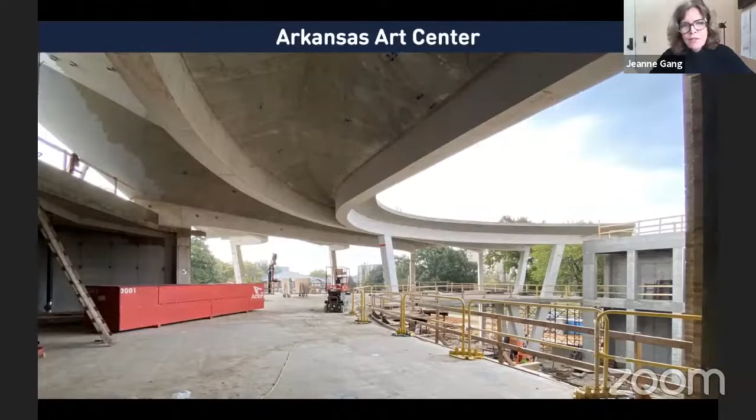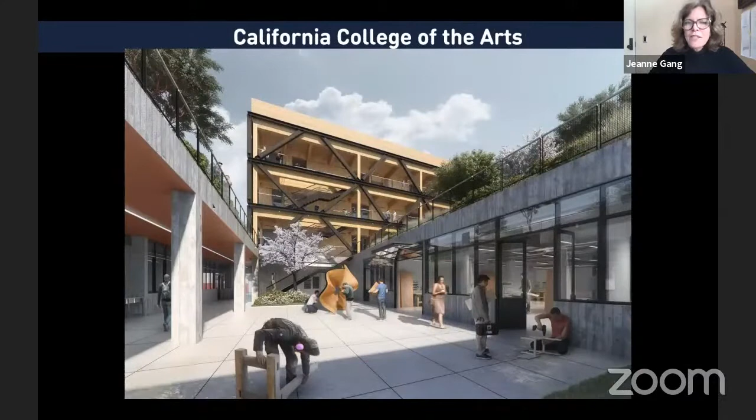We're in construction on the Arkansas Art Center, which is really a campus of buildings that we're editing and adding galleries and social spaces to. We also have a project just beginning construction in Paris: the University of Chicago Paris Center, which will be their place for overseas studies for students, and the California College of the Arts, a really interesting timber structure in San Francisco.

And of course, we have the Q residences in Amsterdam, currently in construction as well—two residential buildings paired in the south part of Amsterdam. The thing about the sharing I was talking about before: this recently published book by Phaidon groups these projects into families and shows how they're related to each other, and how they make people relate to each other and to the environment.

My first practice, going back a little bit, this will be in kind of 3 parts: the beginning of this idea about community, sharing and relationships in first smaller scale projects, then taking that to a larger scale, and then bringing it back to more connected urban realms.

This picture shows my office before, when we were on the 2nd floor of this Aldo shoe store in Chicago, right across from a wig shop, in this very gritty part of the city.

At that time, I was starting with projects that were community centers all over the city. For some reason, it was just a program that found me, but it allowed us at Studio Gang to really learn these different communities. Chicago really is a city full of different kinds of communities, different characters, different nationalities of immigrants gathering in parts of the city.

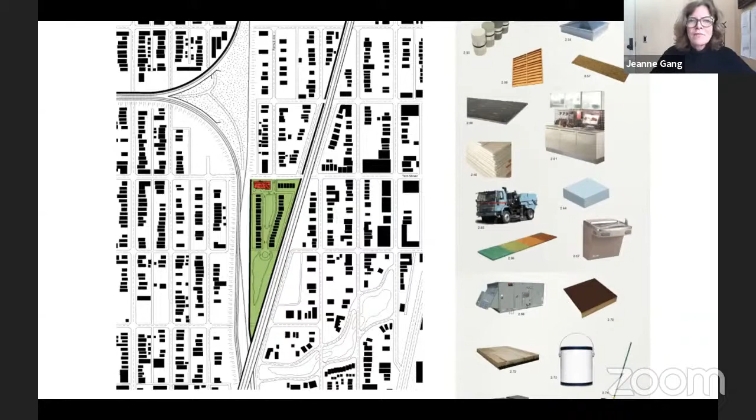It was really interesting because everything about this project was donated: donated materials, donated services, donated site, this green triangle. The red is the community center, and the little homes along the railroad track were the foster homes. It was eye-opening because I saw there was almost no money for this very important program.

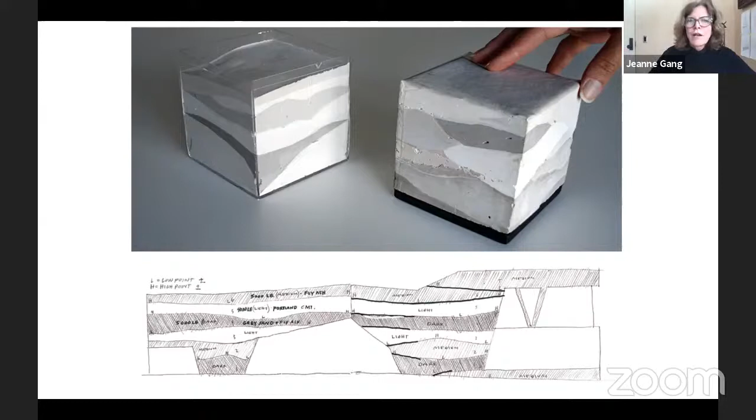So in this project, we actually asked some of the big commercial projects downtown in Chicago to give us their extra concrete. We developed a way to expose, show and celebrate this donated liquid concrete from different buildings coming together to create the shell, the frame of the building, which was so exciting for me.

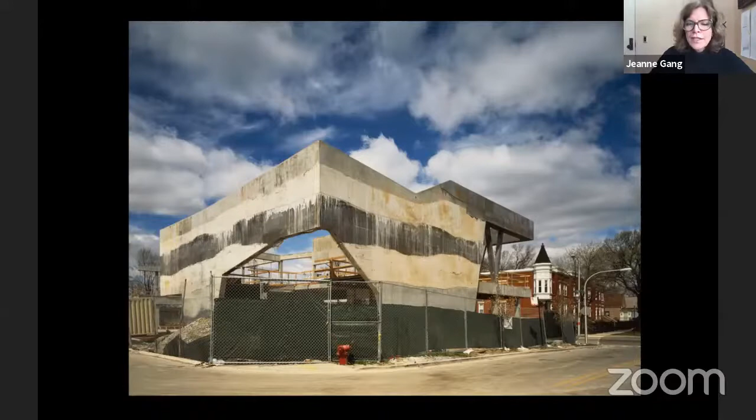When we ripped off the formwork, you could see the real pattern of the fluidity of the concrete, and each mix was performing its best duty, the strongest ones next to the weaker ones, working together to create a support shell for the building.

This community center in the Calumet area, a kind of area full of former industrial sites, the idea was that we wanted to reduce the footprint of this building by using and reusing materials that were thrown out or left over.

This building was a kind of metaphor for a nest, built by birds who are trying to use things that are abundant, nearby and available.

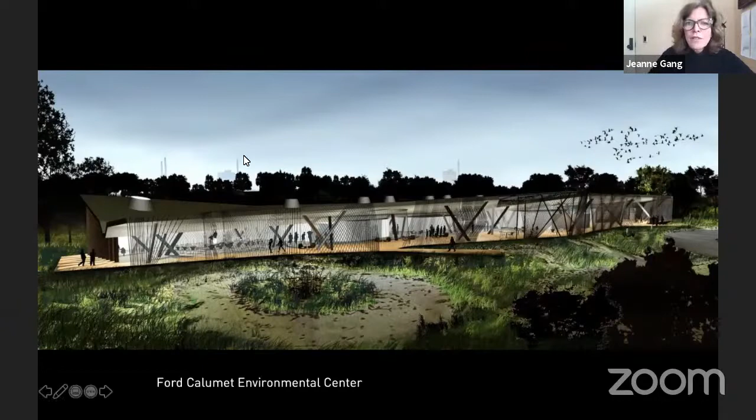If you take that on as a strategy for architecture, it's quite interesting, and it produced an incredible thesis. These column clusters would start with what's there, what materials you could find, and then be designed structurally to work with whatever type of steel one could get at that time.

A lot of steel is rejected from projects for various reasons, and normally it would have to be remelted and reformed. But here we could use members that were maybe slightly bent or flash rusted, and create these column structures. So we had to design these to be workable for whatever we found. This is really a different way of thinking about architecture.

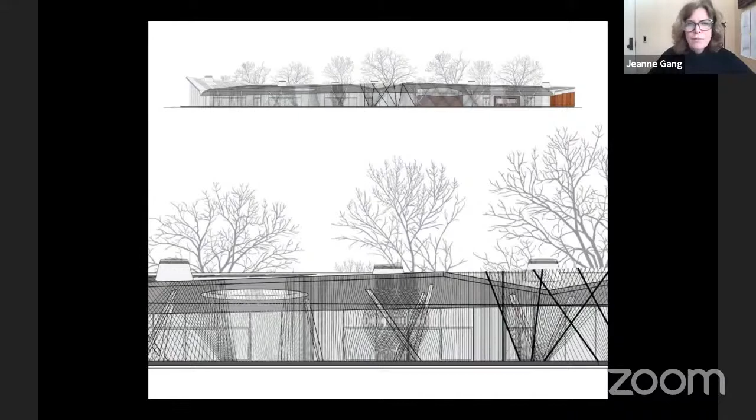That produced this kind of building that also had a protective mesh to protect migratory birds that move through the area. So with these early projects, it's really about observation, which is also called research.

I really think this idea of observing means we can learn from looking at patterns of social behavior. And I realized in these early projects that instead of channeling the previous generation's preoccupation with purely formal moves, we could use these skills and observation to affect change, to instigate change through architecture, essentially one project at a time.

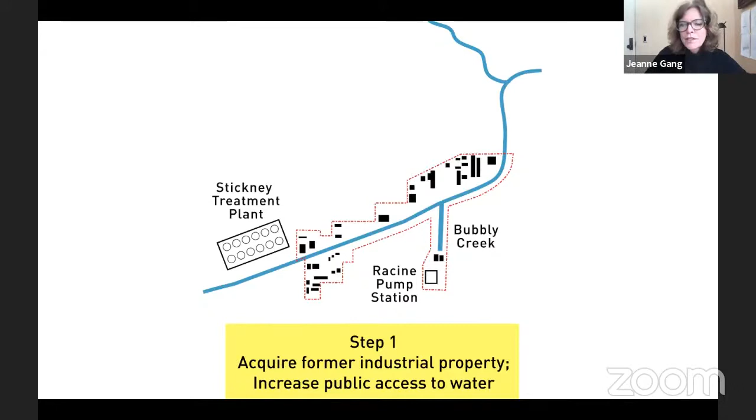Eventually that book project was seen by the mayor of the city and others, and we did some talks about it. Soon enough, a new mayor came in and wanted to put a mark on the city by reintroducing the public to the river. At that time, a number of architects, including ourselves, were asked to do projects along the riverfront.

This one is a boathouse that would suddenly bring youth to the river. Even though the river is still polluted, the whole idea was to create a whole new generation of stewards that would then care about the quality of the river.

In a way, you're creating the future you want to see through your practice, and that's what I've been trying to tap into. For the project, of course, the architectural form is important, and the design is important. We were trying to make this moment of engagement with the river very exciting and dynamic.

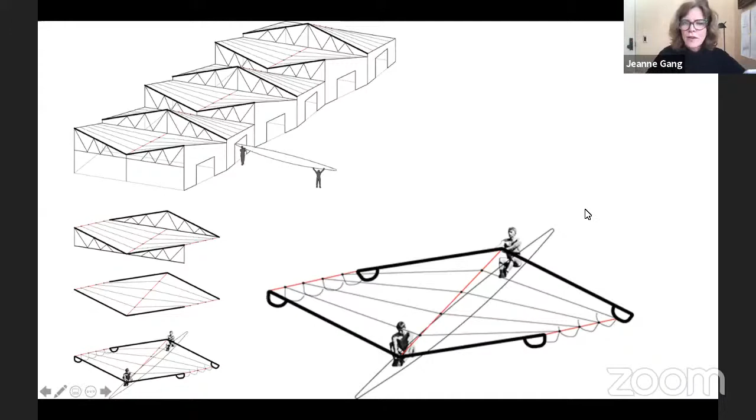Here's a little model of that building, and you can see this warped surface. All of this had to be done on a very tight budget but also a fast schedule, as you have with projects supporting a political ambition, I guess you could say. But here the ambition was a good one - to get people to the river and create programs for youth in the city to help them succeed.

This is done with slate on the exterior. The park district, who is the client, wanted masonry buildings, and we convinced them that slate could be considered masonry.

Inside, on the second floor of the field house, you have this Vierendeel truss system, kind of eking out an extra floor by using a Vierendeel and letting it support yet another floor and a roof, using simple plywood—not high-end plywood, very affordable materials—to create a very dynamic space, almost like the hull of a boat, and that really gives it this dynamic feel.

This program has begun to expand—there are classes there for veterans with disabilities, and all kinds of people are using this.

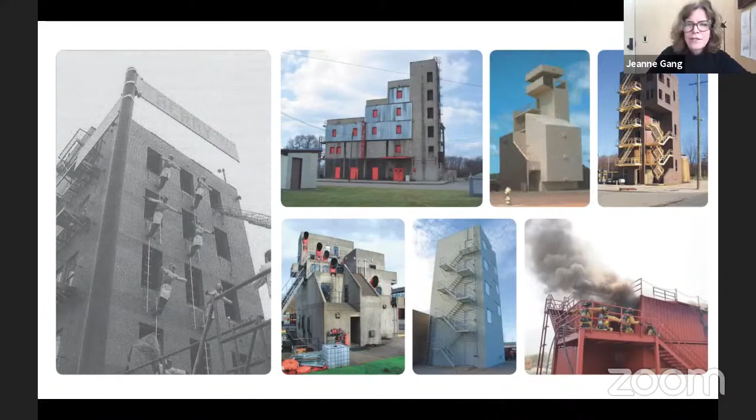So in this project, we were looking at what practice is for rescue workers. These are like test buildings used for that purpose—lots of stairs, lots of openings—because essentially what they have to do is go into a burning situation with smoke, poke holes in the building, allow the smoke to get out, get in there, and get people out.

I was amazed to learn that rescue workers really know architecture. They know every single floor plan of the different styles of buildings in Chicago. This is one of our sessions working with them to figure out how to design their practice facility.

And this is the final building we finished. It took a number of years to complete, but it's really all about these voids—the voids that are used for practice. You can see them up on top.

Different ways to move in and out of this building, using it as a tool for learning how to fight fires and rescue people. It's also had this kind of positive impact on the neighborhood as well. When we first started there was nothing, and now it's really having this expansive effect.

These are some views inside, of the fire truck going in, and this void that goes up and down the middle, bringing in natural light to the gym and the other areas used for practice.

This is the area where you can see the scale on the wall, learning to judge dimensions, et cetera. We used a simple concrete tilt-up structure with some fancier terracotta baguettes around the openings to highlight those. That was just finished last year.

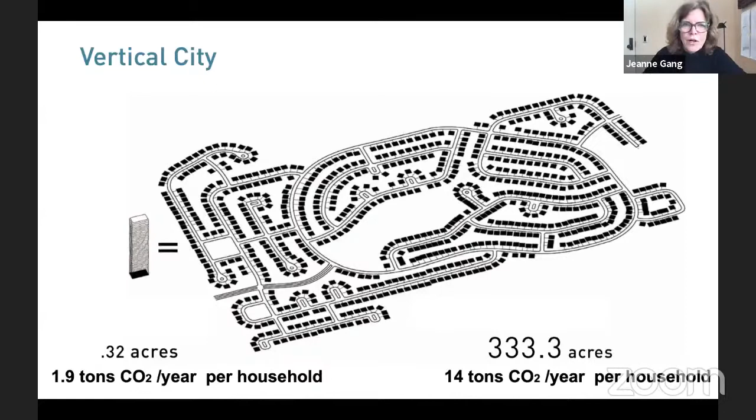Discovering that people really didn't talk much to each other in these towers, observing the behavior, like people in elevators. It's kind of awkward being in an elevator and having that separation between living way up in a building and going to the outside.

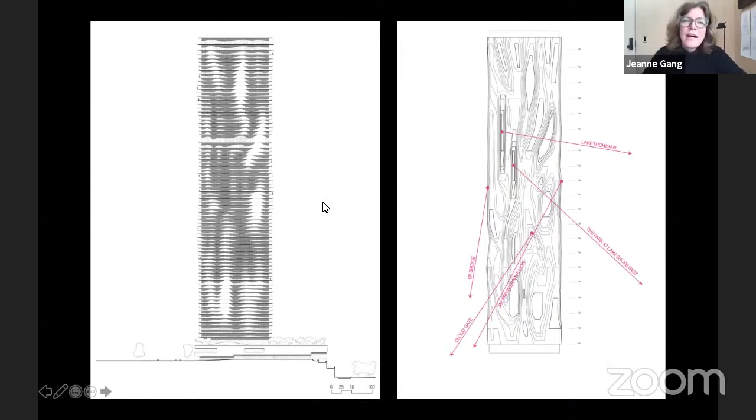So we took some cues from the landscape around Lake Michigan, like these irregular edges that seem to give you diagonal views and patterns that break up the monotony. This building was really done thinking of it as a topography, where the hills would connect people to different things in the city around them, if they could step out onto those hills and see around corners and things that wouldn't be possible if you were just in a straight up facade, and see each other, of course. That's really how it started to develop.

So the irregularity is purposeful in that it allows this connectivity, but it also breaks up these strong winds that are troublesome for tall buildings, which really make you have to use a lot more material in the structure.

Some of these balconies are very large - they can host parties and things like that, socially connecting people to each other and at the same time to the city beyond. The balconies became, for these types of residential buildings in the city, this intriguing way of making a threshold, an exterior space that's both inside and outside - almost like a front stoop would be if you lived in New York, or a porch.

This project called City Hyde Park explored using the balconies in this way to connect people. Each one of these is a stem, modeled here on the right, and they're just rotated in different ways to give different conditions. Sometimes they're two stories high, sometimes more like an extended cantilever. They give an animation to the facade, a kind of rhythm, and create almost like a social network on the exterior of the building.

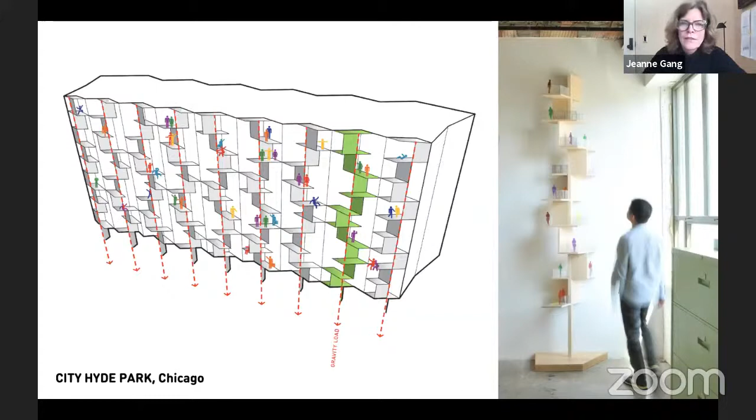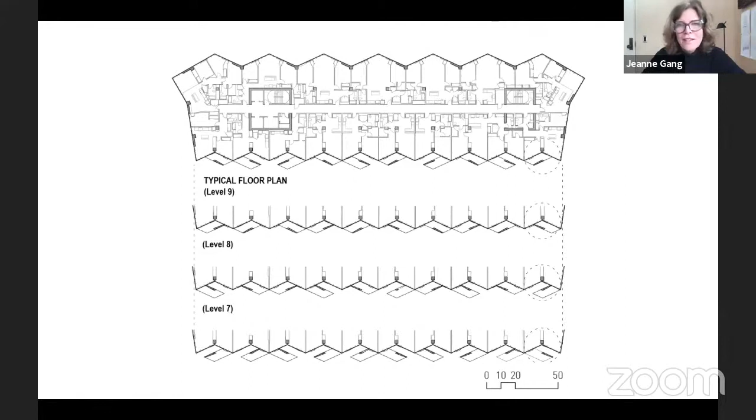If you look at the plan, which is very simple, the north side had these bay windows overlooking the city. I was thinking more introverted people could live here, and extroverted people could live on the south side with this really active, dynamic facade. Supposedly it has kind of worked out that way.

This was designed for a mix of incomes, and it does include low income housing within it as well. So it's really a mixing chamber as well.

Here you can see this pattern, which really starts to be Escher-esque when you look at this side of the building.

Another aspect of how to design these commercial buildings with something in mind for the greater good is this one called Solstice, where the client wanted to have balconies for about 30% of the units.

So we thought of carving the facade back to create solar protection. In Chicago, this is the solstice angle of the sun at 72 degrees, which means that in the summer, when there is a lot of heat gain, this angle really protects the entire interior spaces from direct sun. In the winter, when you want that heat gain, it can come right in. That was kind of the proposition and question for this project.

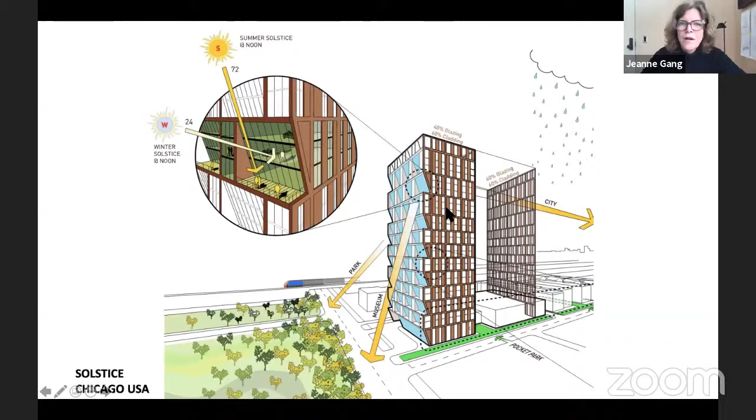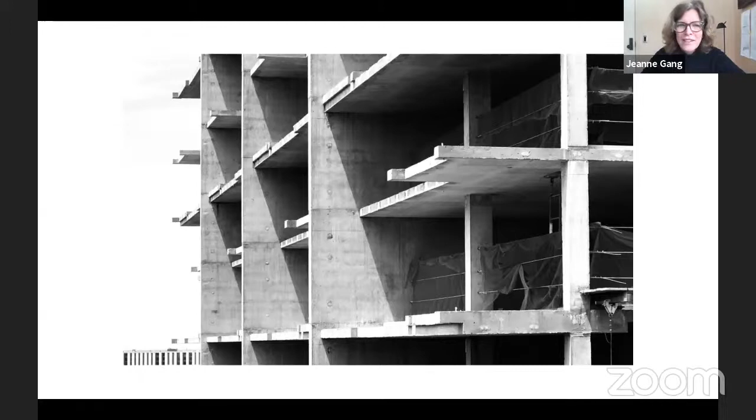Just to show you how some of these things come out - of course, this also makes really nice social spaces for people. This was a picture during construction at Solstice, where you can see that angle rendered in light and shadow, showing the whole idea of the building. But then you get this almost expansive space on the inside that gives you this feeling of greater space than what the floor plan actually is.

And then, lots of common areas in this building too, experimenting with living in the city and making that more interesting. And then there's this last one that I wanted to share about a commercial building, an office building.

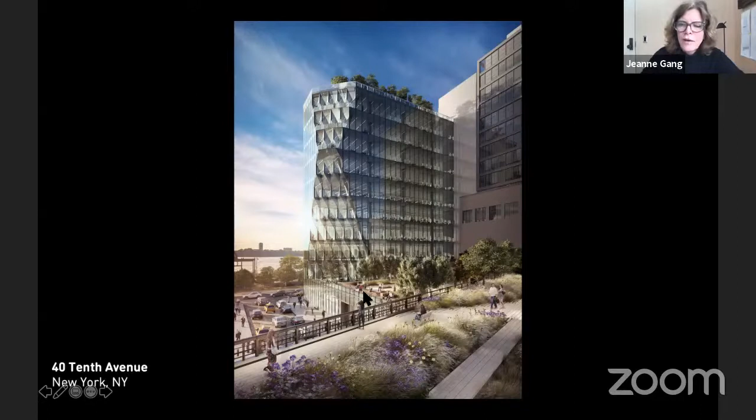So just the framework for thinking of this project: our site starts right on the High Line and goes back. We really took a look at the high-rise code for New York, the tall building ordinance, which required—these are illustrations by Hugh Ferriss—that all the buildings in New York be carved back from the street in order to let light and air down to the street.

Hugh Ferriss did these images showing the code translated into a building, so you get the step-back skyscraper. What I want to show you is a kind of turning that on its head, because when we apply this red L-shape setback ordinance to our site, you get that step-back skyscraper. But actually, with the amount of area we have, we get an L-shaped building with a podium.

When we looked at this, we realized how the High Line had really become the public space on this site more so than the street, because the street is wide open to the river. We argued that when building along the High Line, which is an interior block public space, we need to think about this differently.

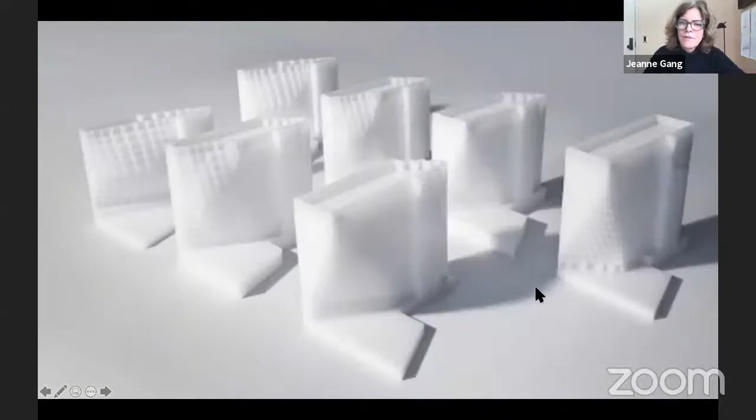We proposed taking that area away from the High Line and putting it up on top, away from the High Line, and then further carving the building with sun angles and view lines, so that people from the High Line could actually see through to the river.

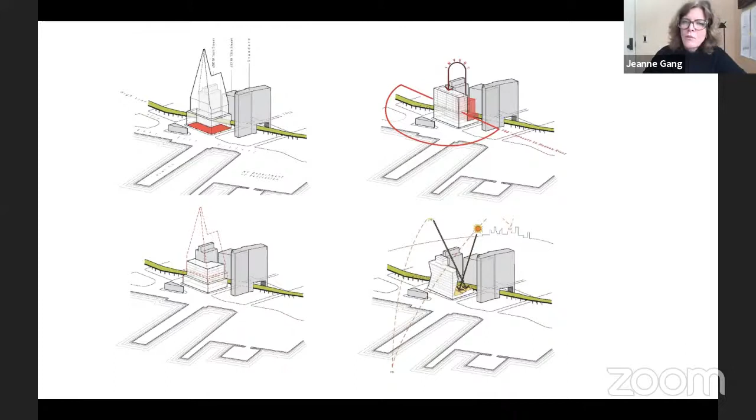This is different from what most people were doing at the time along the High Line—everybody was trying to push out over it and get the best views. It was just all about me. So our approach was looking at how we could shape the building for the better of the neighborhood.

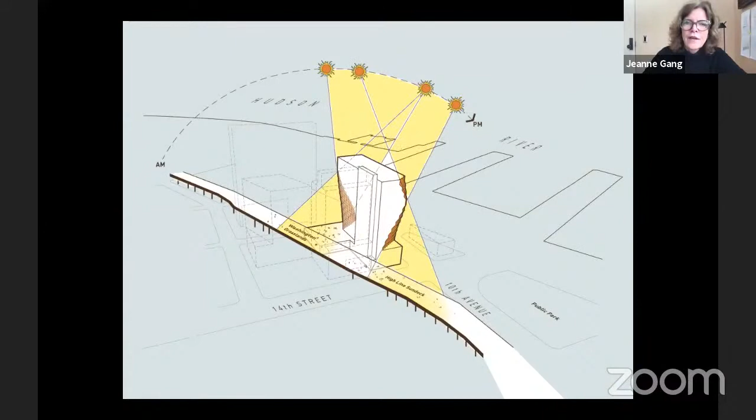You can see versions of it here, with different amounts of carving based on what kind of area we'd be allowed to have. So here's the concept: we set it back from the High Line, and cut away areas near the High Line for views, and we ended up able to produce much more sun on the High Line than if we had done it as-of-right.

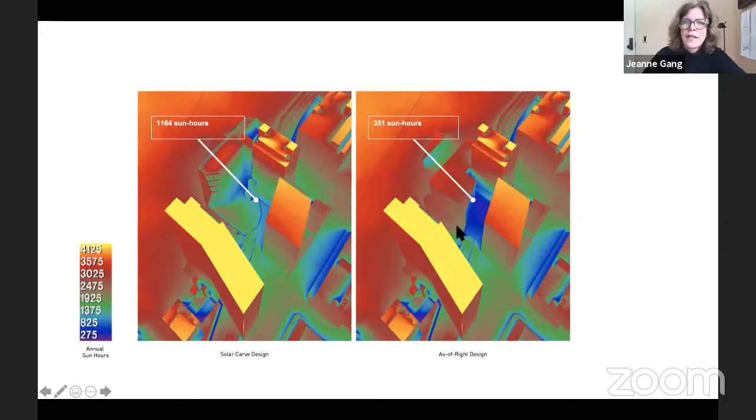So here's our building and the light getting to the High Line: 1,164 hours compared to 351, if we had just built it according to the code that was allowing it.

Those special areas we treated differently, with a different kind of window system. Again, we don't know who's going to be in this building, but in general it gives a sense of awareness of the public space, and awareness of what's important to the city, not just what's important to the building. At the same time, you get amazing spaces on the inside of this building.

So I think that's kind of what I was imagining of how we can translate this idea of actionable idealism to a commercial building. Finally, wrapping up with a few projects focusing on the relationships that architecture creates—it's almost like a stage for setting up relationships, not only between us as people, but also between us and our environment, which I've touched on a little bit.

Here we were specifically asked—this is the Arcus Center for Social Justice Leadership in Kalamazoo—to create a building about making strong relationships between the students and faculty working on social justice projects, and to the campus at large. This project, finished at about 10,000 square feet, had no real precedents for social justice centers.

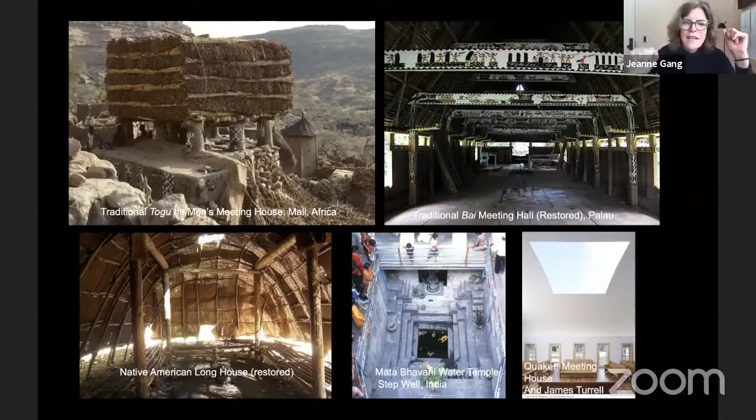This one up on the upper left was interesting — in Mali, where the elders meet, they have a very low ceiling, so you can't stand up and get mad. Everyone stays seated and calm.

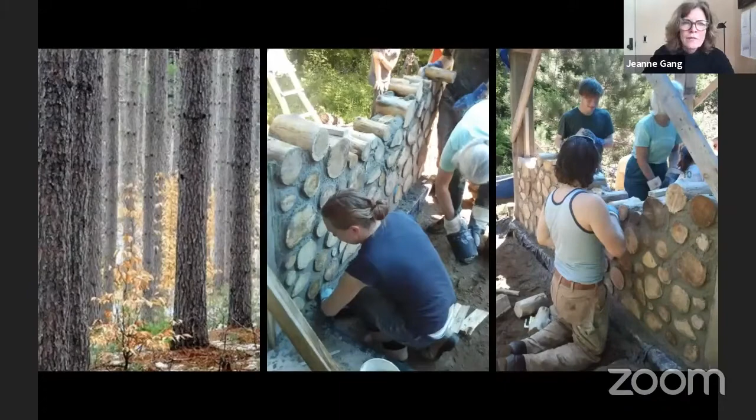And then for the exterior material, just to really embody the idea of social justice, maybe it could be a wall that is made by everyone. So it was kind of an accident, but we discovered this method that was used in Wisconsin and Michigan with cordwood masonry. You're basically using mortar and wood, a sustainable cedar wood grown locally, and then really working to understand that system and bring it into the 21st century, which of course has resistance because people haven't seen this before.

So we actually had to do a lot of mock-ups. We had to buy the wood about a year in advance to let it dry. There was a lot to doing this, and then to make it into a beautiful textile surface that weathers with its age, and at the same time is sequestering carbon within it. It is carbon — trees are really a physicality of carbon.

And then another project that really creates relationships is this Writers Theater in Glencoe, Illinois, a small theater that they used to operate out of the back of a library bookshop, in an area of town that's very car-oriented, north of Chicago.

That's Lake Michigan beyond. So this theater company noticed the behavior of their patrons when they left — they put on some very provocative shows, and people wanted to continue talking about them after the show. But there was no place to do that. In fact, there's really no civic space in this town whatsoever. So the ambition for the project was also to create social space, community, by building a theater.

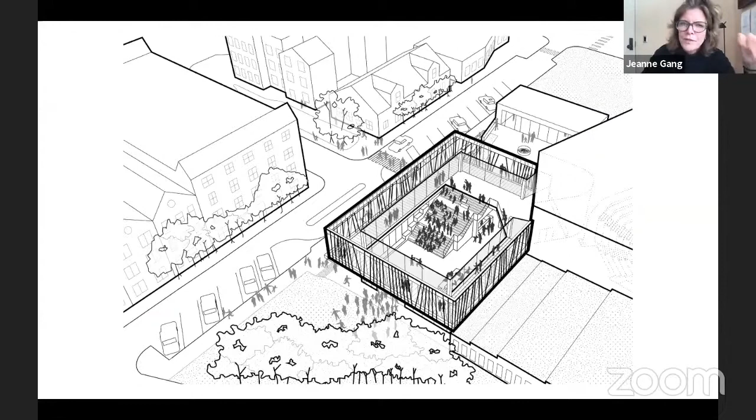The research focused on early theaters, the Shakespeare theaters that were done outside and in the round, where people stood. We decided to employ that idea to the lobby, not the theaters themselves, which are very particular, but a lobby that could double as a civic space.

In this case, I love that this walkway around the lobby goes inside and outside. It's kind of in the canopy of the trees, made with wood that is acting in tension, holding this walkway. You can see here there are Vierendeel wood trusses, and then beams on top of these trusses go out beyond and hang the walkway with the wood battens. And this big door allows it to be totally open to the park on one side, and then connect to the different levels in a very social space.

That's really transformed the town. Now there are kids going there after school to study. There are cafes that want to be there.

And then this other project — these are kind of like wood projects that create incredible community. This one is really a pavilion. They asked us to design a pavilion in this land that was owned by the park district, but the zoo next door, a free zoo, wanted to create a pavilion for students to study pond life.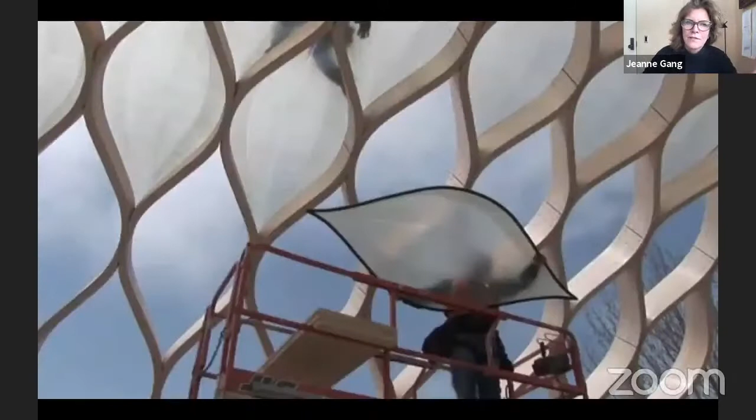So it started out being a classroom, but really it's become this magnet for people for doing all different kinds of things, like dance and yoga, but mainly like the place where people go to get their photos taken for engagements and weddings. So it's creating these relationships, or setting the stage for these relationships to take place. So I think if architecture can make people start making out, then you're really having an impact, right? So it's all of these things coming together.

One of my favorite things was really just when they took it over to do this big Diner en Blanc, which is an impromptu dinner around the whole entire boardwalk, which worked out amazing.

Not all of these things are just cheery nature stories. In Memphis we're working there on this riverfront concept and the parks along the Mississippi River. And it has a very troubled past. It's a place where Dr. Martin Luther King was assassinated and has had lots of troubles over the years.

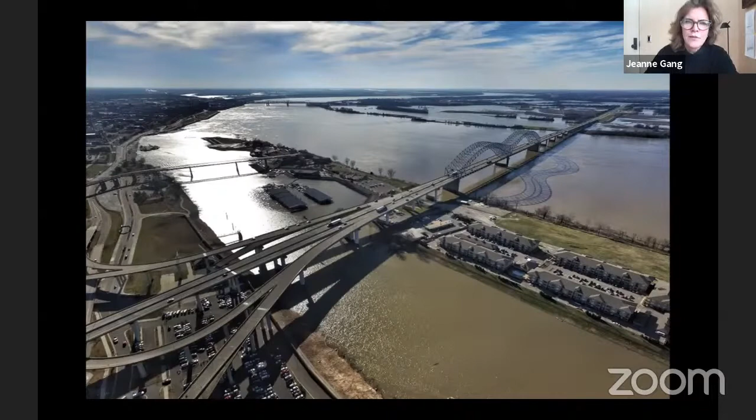But they're on this gigantic, wide Mississippi River, whose levels change up to 50 feet in difference in elevation. So it's difficult to occupy the edge of this river system with such a large change in heights of water over time. So the interesting thing here was that Memphis was really built with its back to the river.

So on the left is the river, on the right is Front Street. So everything went onto Front Street. And so they really wanted to start shifting that and taking advantage of the riverfront. So they asked us to look at that. We've become more and more working on urban scale because we're looking for these different assets that we can connect together to make these stronger relationships.

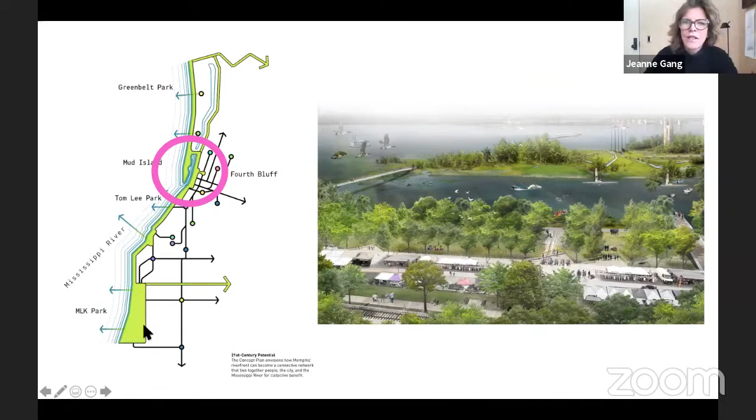So one interesting area here, circled on the left, was this big riverfront area, and this is our plan on the left, starting to connect the city over to the riverfront and then along the riverfront. But Cobblestone Landing, this orange area, was very perplexing when we discovered it. It was a landing made with cobblestone, and it turns out that this island out here beyond was not originally there. So it was a loading land.

And right when we were working on this project, we started asking people what they thought of it, and they had very mixed views. Different people thought different things about the space.

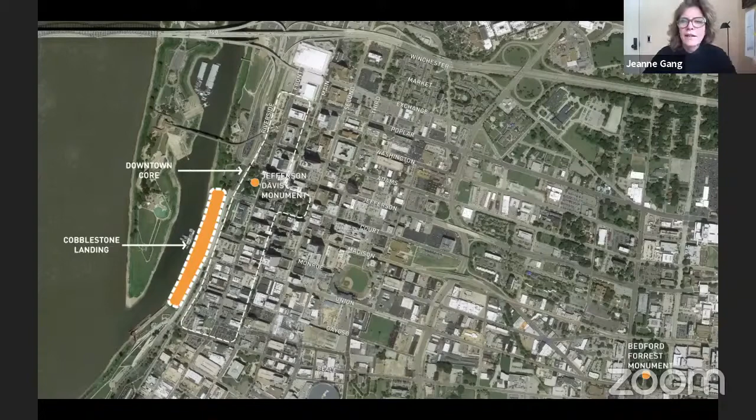And at the same time, this was a summer when two Civil War monuments that were very offensive, one of Jefferson Davis there in orange, were taken down. The other one was Bedford Forrest over on the right. I don't know if you can see it.

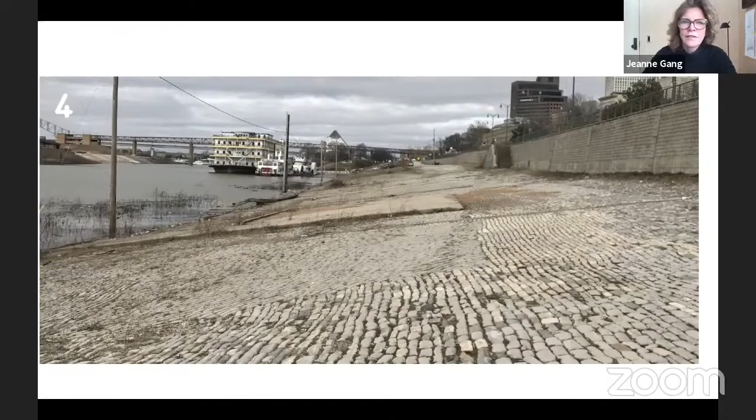And so this is the Cobblestone Landing, kind of in disrepair. It was a place for commerce and shipping and loading. And then it became many different things. It was a parking lot for a while. It was a place where World War I soldiers' caskets were returned, but it was also a place of cotton.

The cotton industry, which means that people who were enslaved, African Americans, worked on the dock. They were not traded there, but they worked on this place. So that's why this had this very difficult history.

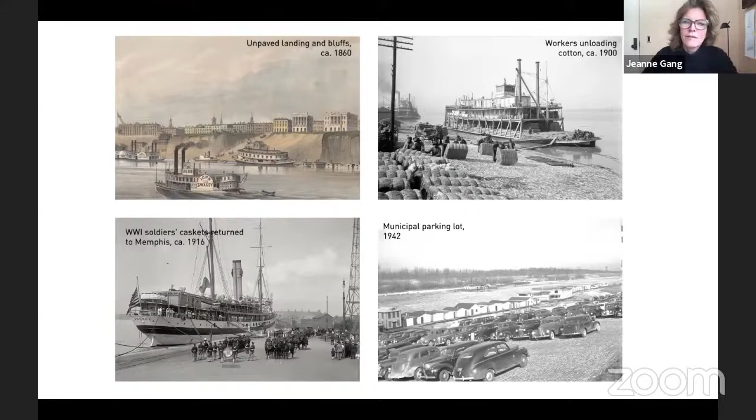So Tami Sawyer here, who started this movement of Take Them Down, was really inspiring. She actually got these two offensive statues of the Confederate leaders taken down while we were there.

So we thought, what if this Cobblestone Landing could somehow become a more inclusive type of marker, a monument, something that's not putting a statue on a horse on a pedestal, but something that would represent the whole community. So we started a process where we engaged with community members, and it really was the question of how communities can remake public spaces with complex histories.

So as we did this, we picked some different leaders from different realms. That's Tami Sawyer there, and we recorded her story and sketched what she was saying, and really started to talk to different people throughout the city. This is Nickelberry, he's something like 80 some years old, a sanitation worker who walked with Dr. Martin Luther King - Elmore Nickelberry. He was very interesting and wanted to talk about that march, but also his relationship to Memphis, and we sketched that.

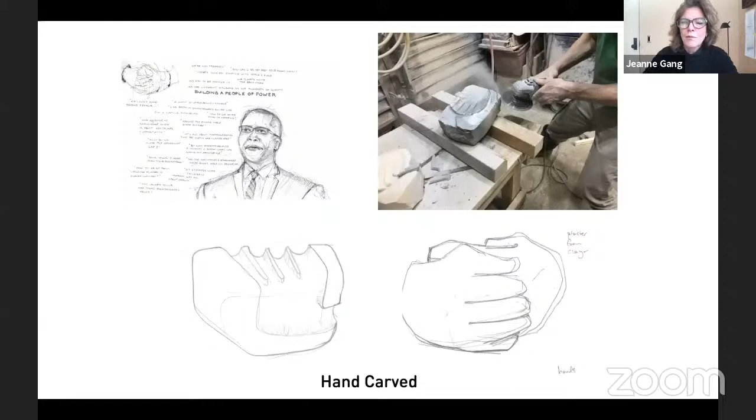So what we tried to do here, and it's still not a finished project, it's still one of the future projects we'll be doing there. We tried to bring community stories into the cobblestones. So putting all these things together, putting the sketches together, trying to interpret them into these cobblestones, which we were able to get a number of them and start to incorporate these designs into them.

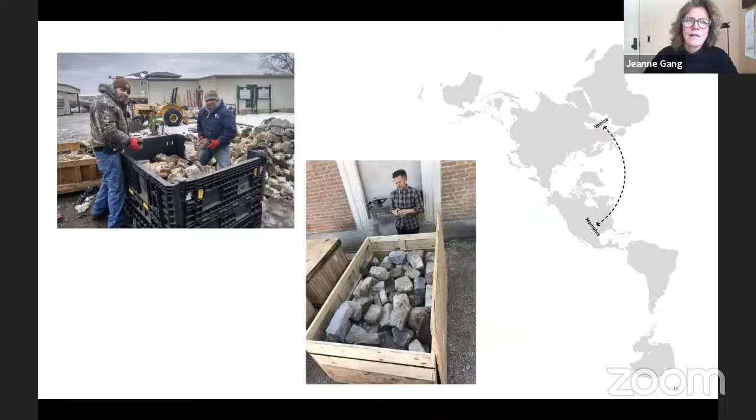Maybe some of you might have seen this, which was shown at the Venice Biennale in 2018. These are just some of the different ones. We shipped these stones over to Venice and installed a piece of the Cobblestone Landing there, and then also showed the stories of Memphis and the stories of some of these citizens.

So that's really all I wanted to show you today. We're working in these different cities - these are different locations, but we're still working on projects that don't have clients. I sometimes try to improve our cities where we are.

In Chicago, we have this green roof that we installed, and we're really working on this idea of a biodiverse green roof, where we planted something like 48 different plants on this roof as an experiment. And we use this bird-safe glass so that we reduce the number of bird strikes with glass, which is a problem in cities. We have the bees, and we have this every year an annual bio blitz to record and understand how many different species are there.

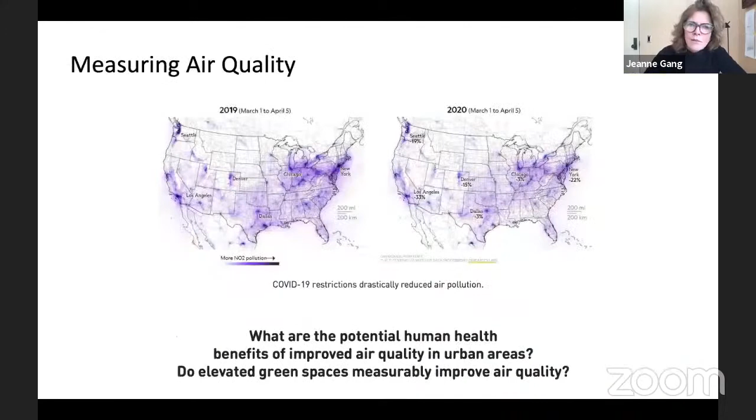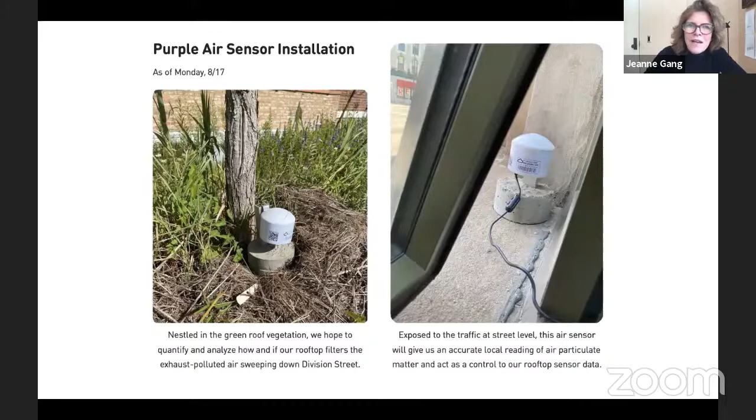Thank you very much.